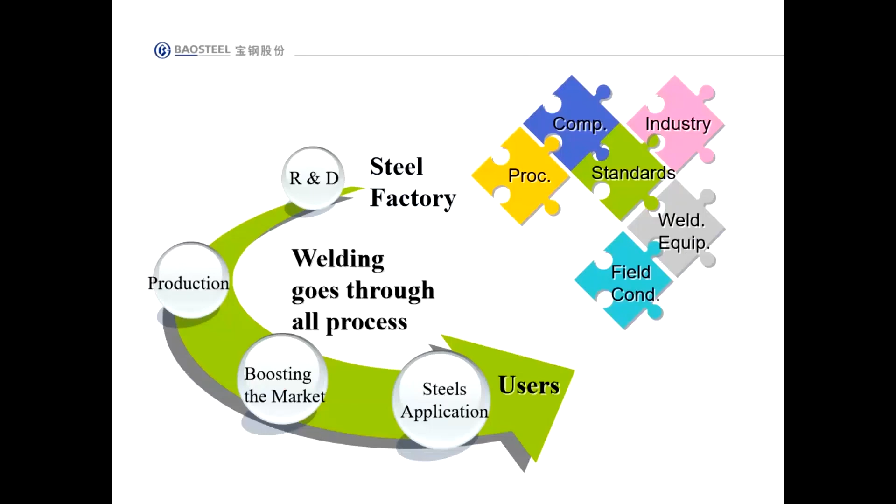There will be 4 parts total in these slides. Part A is a brief introduction of steels and welding consumables. Part B is an introduction of weldability. Part C is the discussion of Gleeble welding research. Part D is the relationship between physical simulation and numerical simulation.

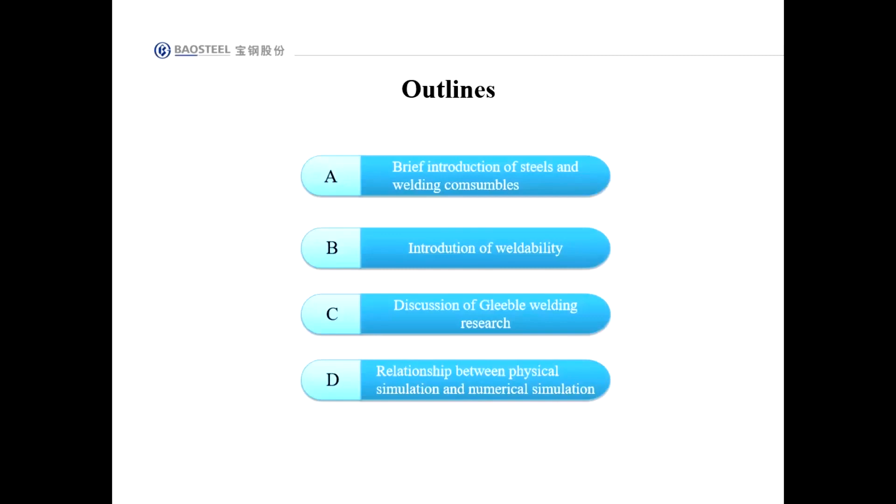Let's get started. Part A is a brief introduction of steels and welding consumables. This is the production process flow chart of hot rolled sheet, beginning from iron ore and coal and ending in our commercial steel products.

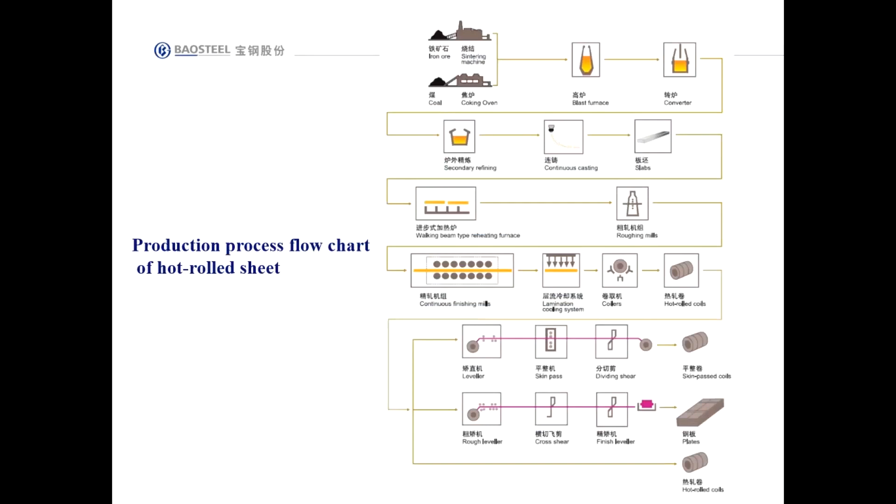Next is our welding consumables. This is the electrode of SMAW. The electrode length is about 250 to 400 millimeters, which are steel rods covered by flux.

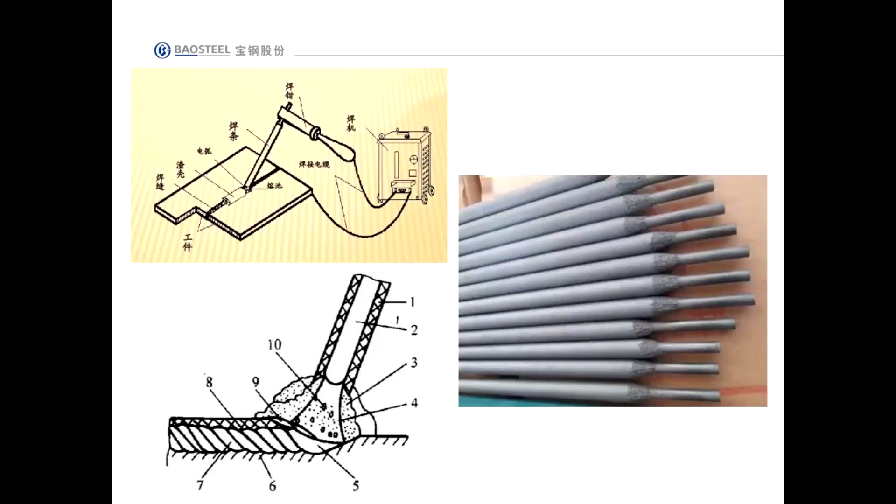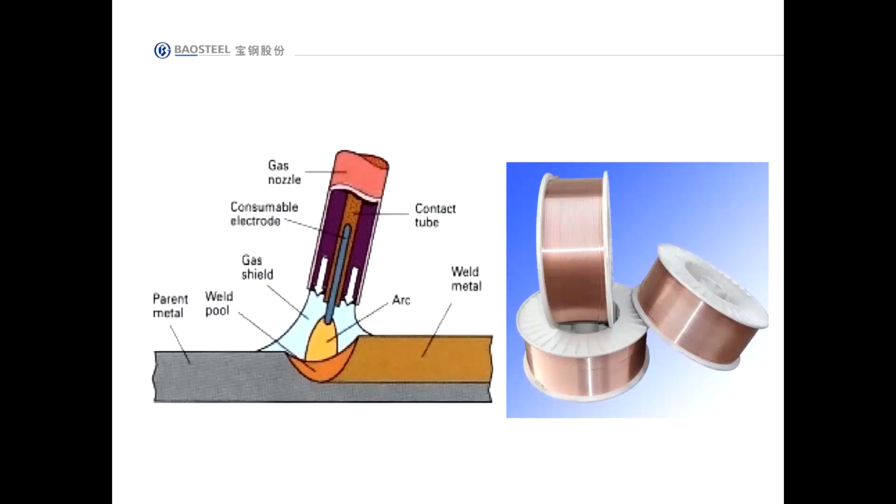For submerged arc welding, the welding consumables are made of welding wires and matched flux. There are several kinds of flux, and a lot of kinds of welding wire. The biggest difference from MAG wire is their diameter is much larger, usually 4.0 or 5.0 millimeters.

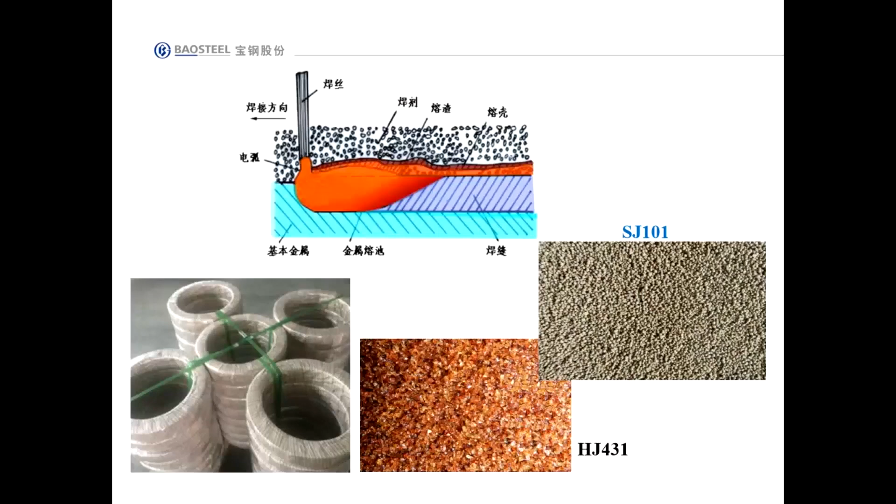For TIG and PAW welding, the welding wire is used as a filler metal, not as an electrode. Usually it is about 1 meter in length, and the diameter is usually 2.4 millimeters.

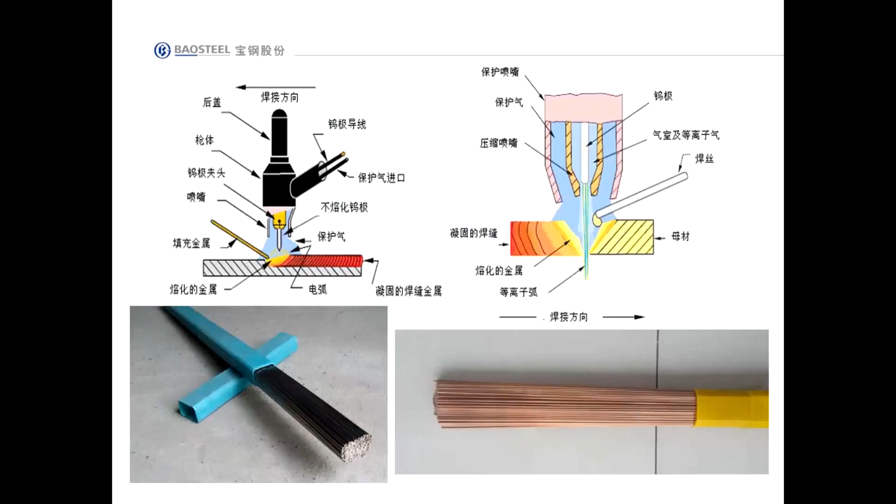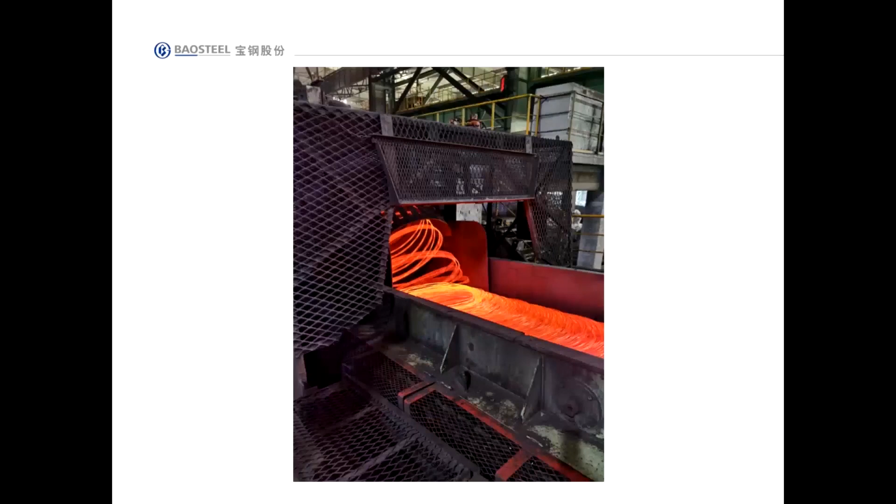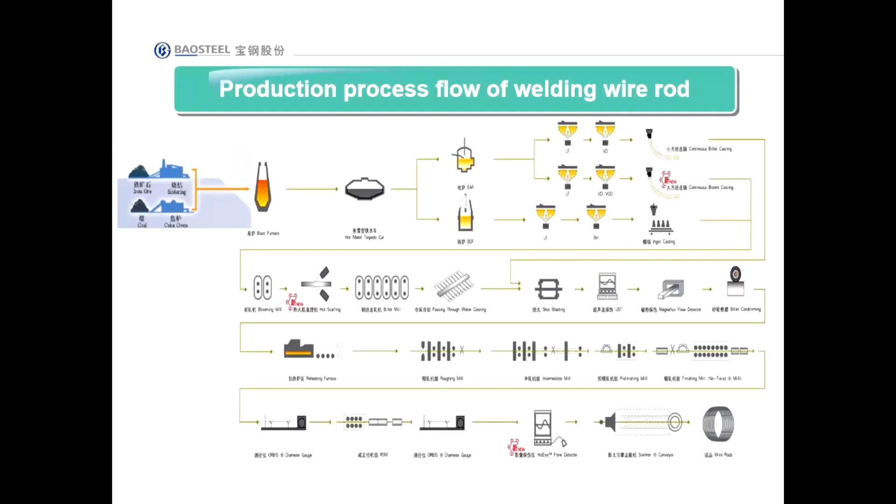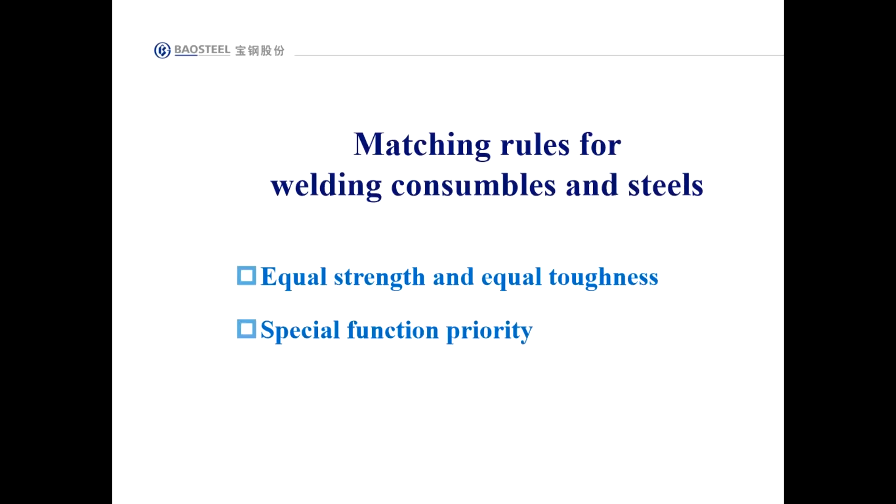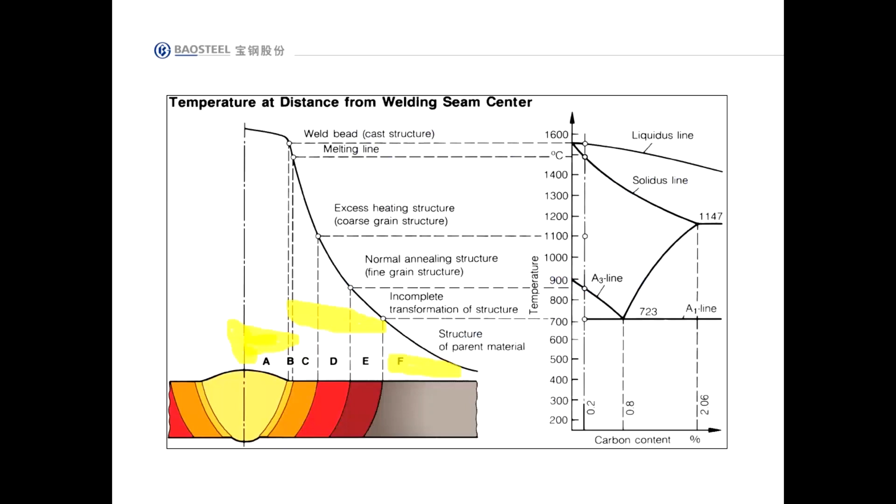This is part A. Next, let's begin part B, an introduction of weldability.

That is to say, we hope it is large enough, because in that way, welding operators of all levels can do a good job, and our steels can be used in much wider application fields. So the welded joint will have good quality, whatever who makes it, whatever situation it is.

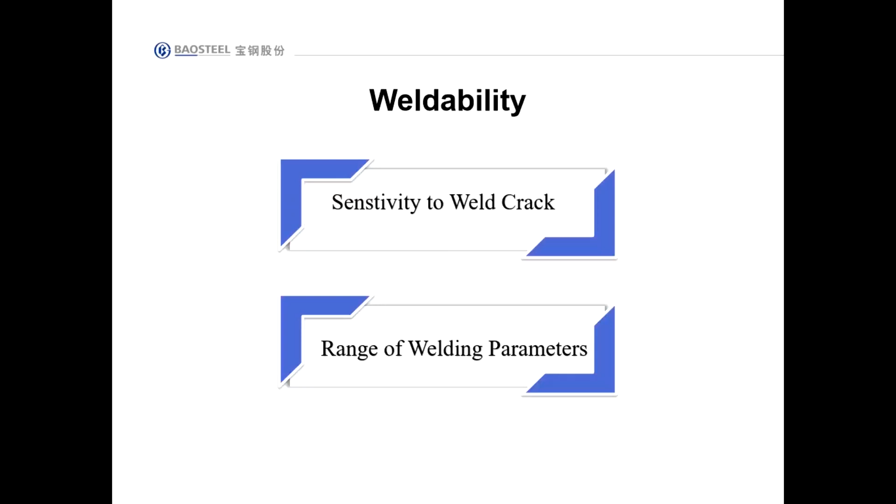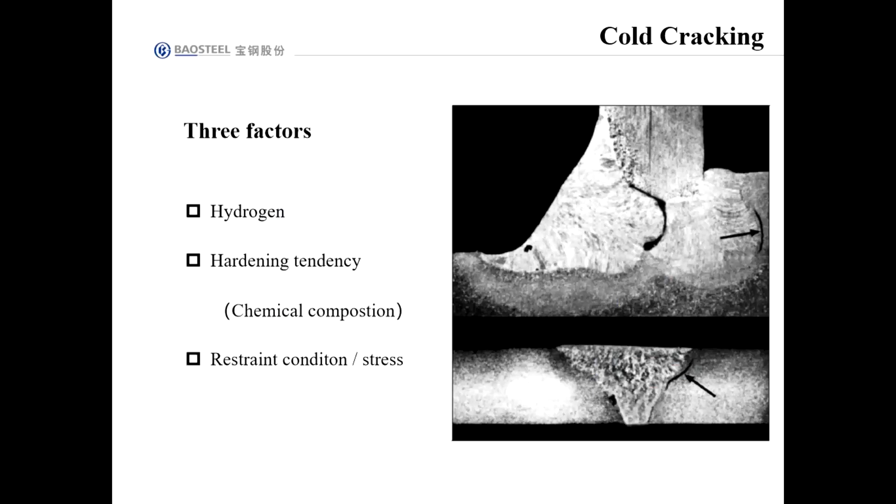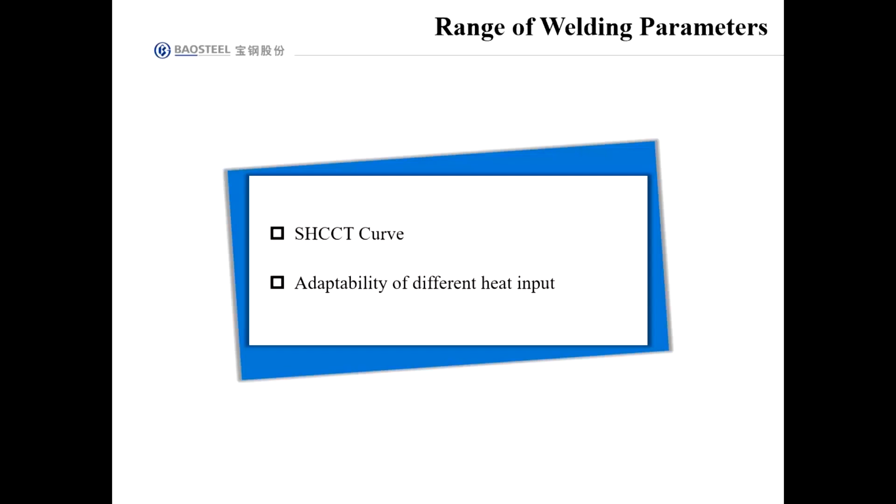Part C is the discussion of Gleeble welding research. This is also the main body of today's topic.

Weldability research can be used to direct the composition design of steels and welding consumables. For example, the hot crack tendency can be evaluated by the value of nil-ductility temperature and brittle temperature range, which is obtained from the high temperature tensile testing.

The cold crack tendency can be obtained from the test of simulated HAZ hardness. SHCCT curve is the base of making a welding process specification, which we also call a WPS. It's very important for our customer to use our products.

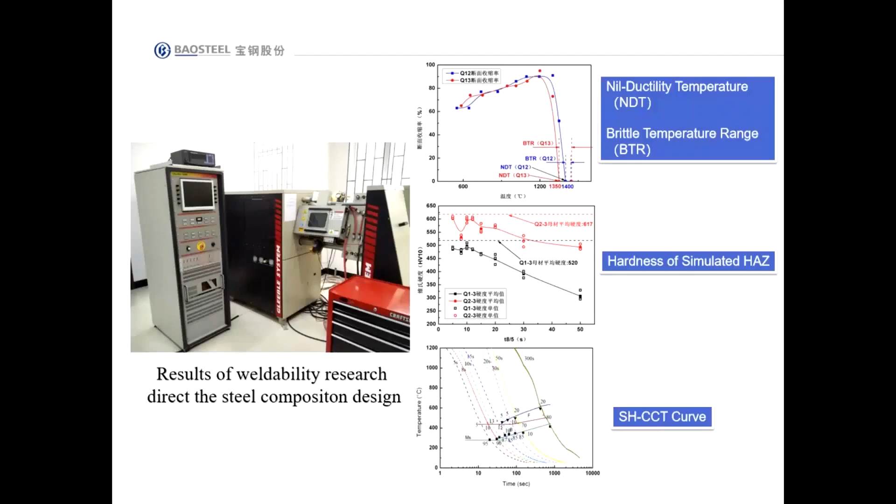Next is a list of some specific Gleeble application scenarios. The first is the microstructure of the simulated HAZ. We can simulate the microstructure at our interested location in the heat affected zone. The simulation temperature program takes different welding thermocycles with different peak temperature and different cooling rate.

We also characterize with T8/5. In this tester, the samples are usually round. These are the simulated microstructure of

coarse-grained HAZ. From this picture, you can know the peak temperature is 1,350 centigrade, and the cooling rate we describe by the T8/5. It is the time from 800 to cool to 500 centigrade.

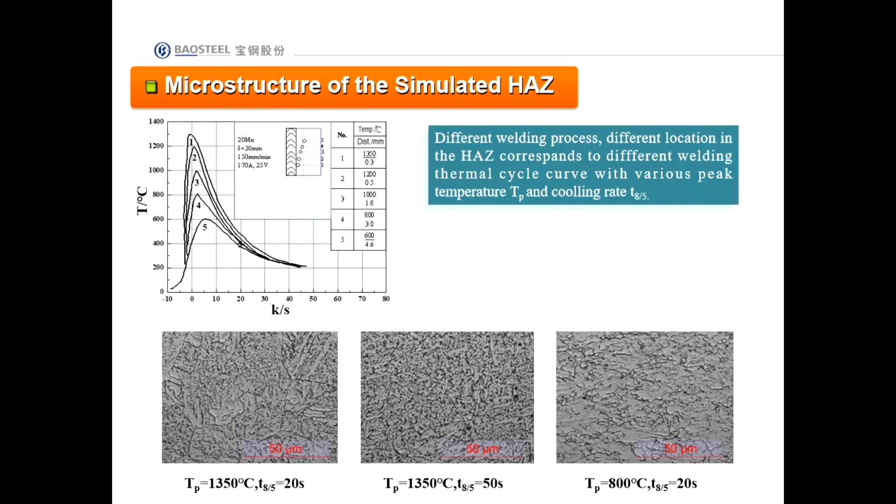The simulated microstructure are in good agreement with actual joints in terms of both the type of microstructures and the grain size. This picture shows the comparison between the simulated and the actual weld joints. This shows that the Gleeble system is very reliable in physical simulation.

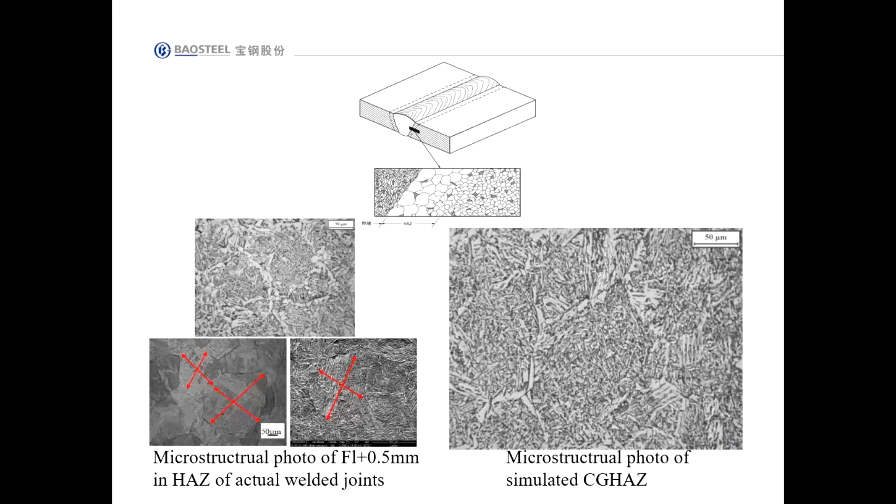Second, the impact toughness of simulated HAZ at the interested position can be obtained. In this test, the square sample is required. This is an example we do, and the test uses different peak temperature and different cooling rate.

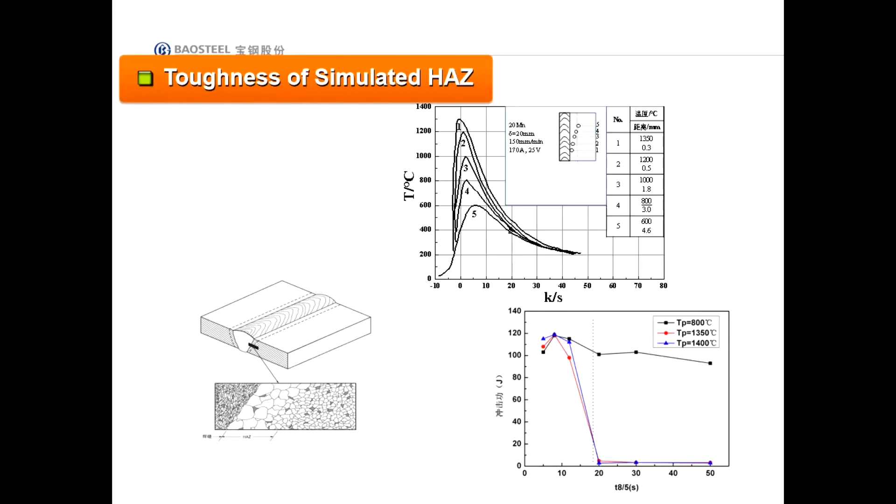Thirdly, SHCCT curves can be investigated and joined. The round bar samples are heated rapidly to 1350 centigrade and then cooled at different rates according to designed temperature progress. During the process, the thermal expansion in real time can be recorded so that the transformation points at different T8/5 can be obtained by determining the temperature of the inflection point in a thermal expansion curve.

Meanwhile, the microstructures and hardness at different cooling rates are observed and measured. Finally, putting the three things together, the SHCCT curve of the material can be drawn like this.

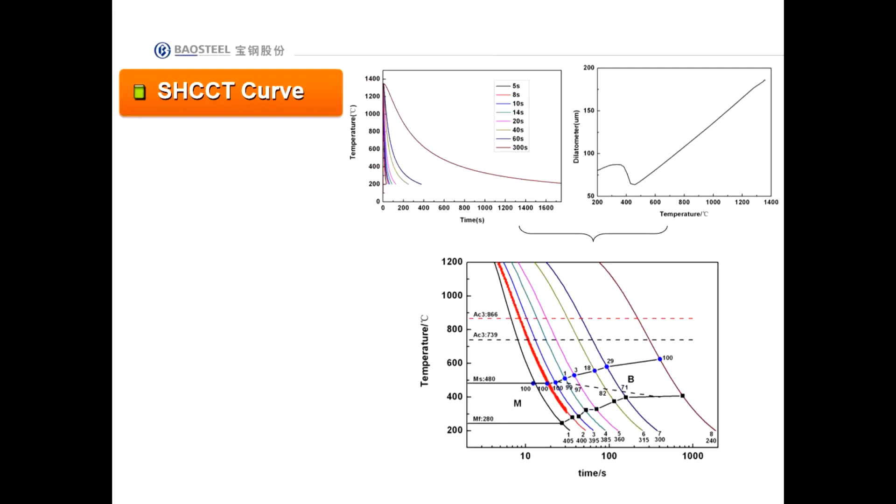This is a SHCCT curve of an ultra high strength steel produced by BaoSteel. This is just an example.

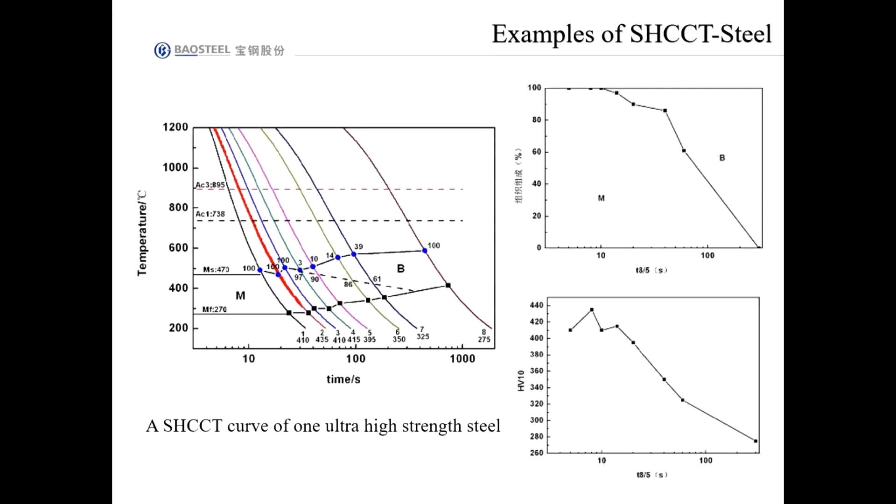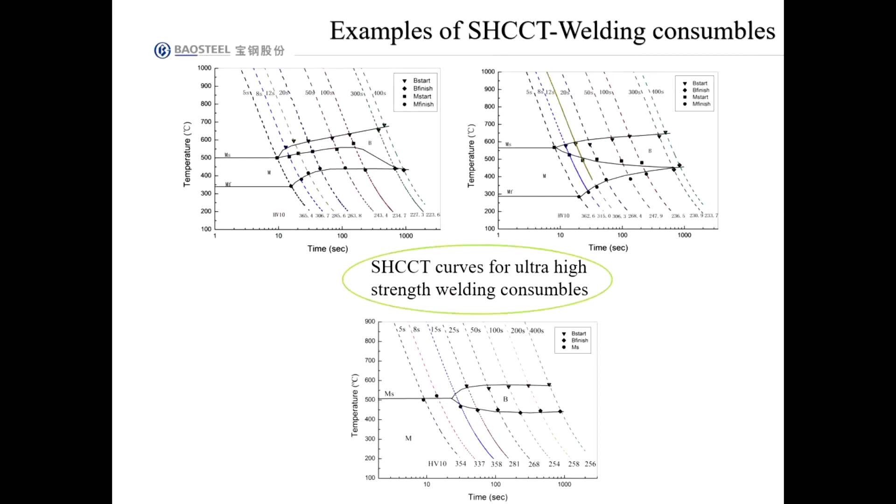This is the SHCCT curves of a series of ultra high strength welding consumables. Actually, it's a series of MAG welding wire with different mechanical properties.

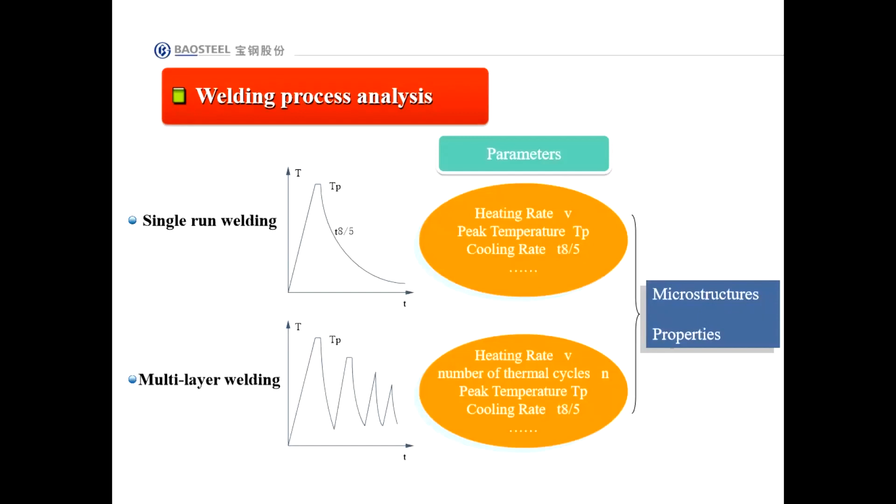Fourthly, a welding process can be analyzed using the Gleeble system. The welding thermal cycles of single run welding and multi-layer welding can be simulated by designing a series of parameters like the heating rate, the peak temperature, the cooling rate, then the microstructures and hardness can be obtained. We can compare and analyze and then decide which welding process is good.

This slide shows an example of a single run welding, which means that only one welding thermal cycle is applied to samples. We can see the tendency of hardening, softening, and embrittlement of steel's heat-affected zone.

Hardening and softening tendency are mainly reflected by hardness tests, while embrittlement property is mainly reflected by the impact toughness test.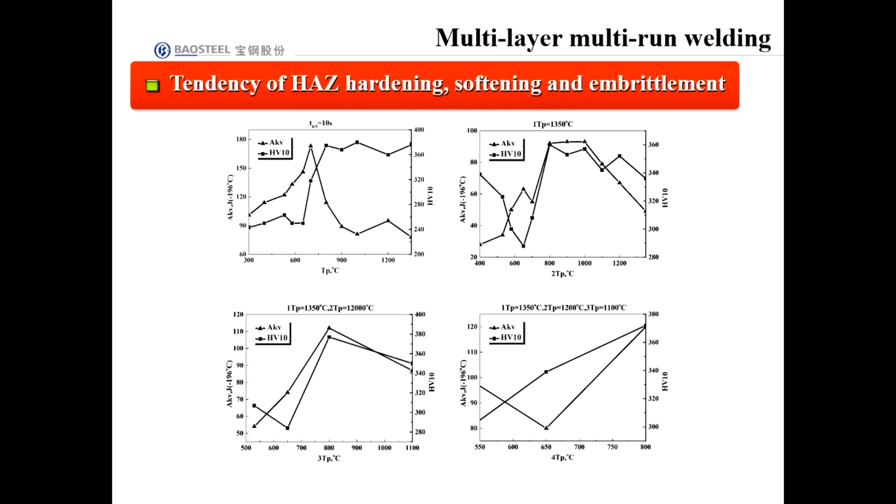Fifthly, a post-weld heat treatment process can be optimized. Which process is better can be found according to properties and microstructures by simulating different post-weld heat treatment processes using the Gleeble system. For example, we can design different simulation parameters, such as the heating rate, holding temperature, the holding time, and cooling rate, just like that.

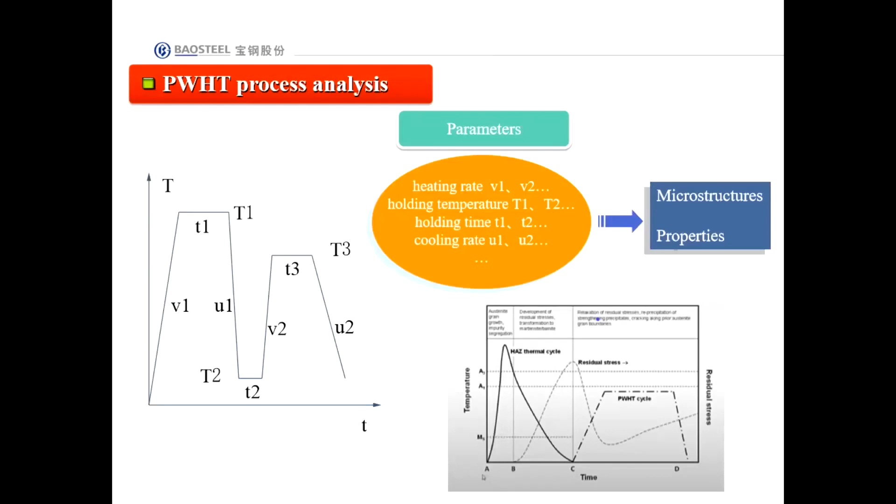For more accuracy, welding residual stresses can also be superimposed.

Next, we'll introduce the sixth application scenario. It can be used to measure the material's high temperature performance data. Some materials' high temperature data, such as the yield strength, tensile strength, and the reduction of area at elevated temperature, can be obtained directly through the test.

The experiment process is like that: the sample is heated to a certain temperature, holding for some time, and then the samples are pulled to break, so we can get some direct results.

We can also get some indirect results, like the nil strength temperature, the nil ductility temperature, the ductility recovery temperature, the brittle temperature range, and the nil ductility range.

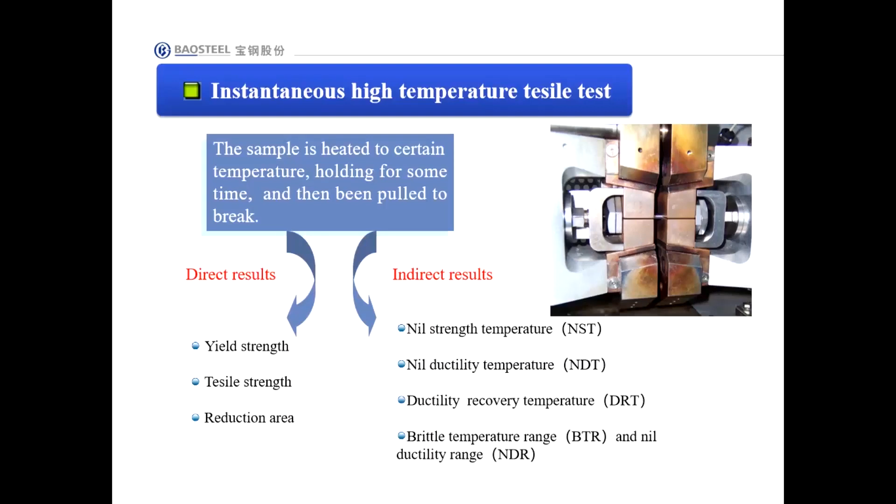The NST can be used as a criterion for weld solidification cracking. What is the NST? It means the strength will be zero when the temperature is over the NST, meaning any small load applied will lead to a crack.

The hot crack is a crack formed at temperatures near completion of solidification, including weld solidification cracking, HAZ liquation cracking, and weld metal liquation cracking.

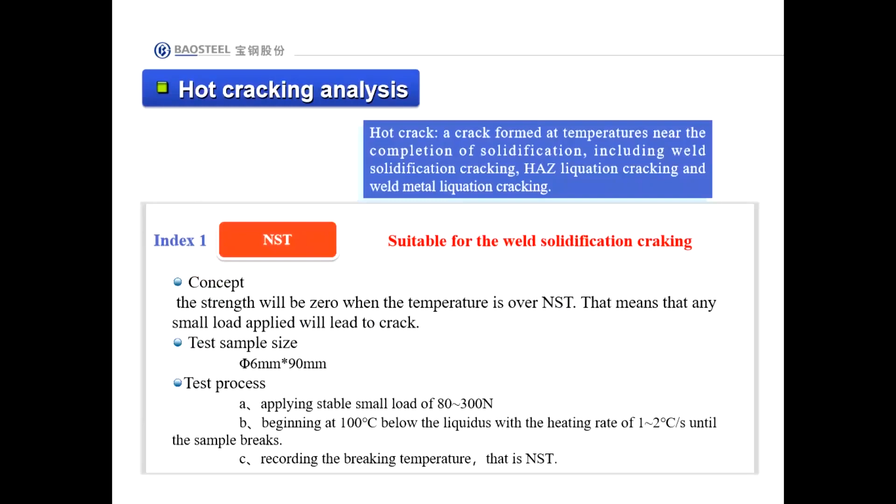The NDT is also a good index for HAZ liquation cracking. When the temperature is over NDT, samples will go brittle, completely losing their ductility.

In this, I don't introduce the experiment process.

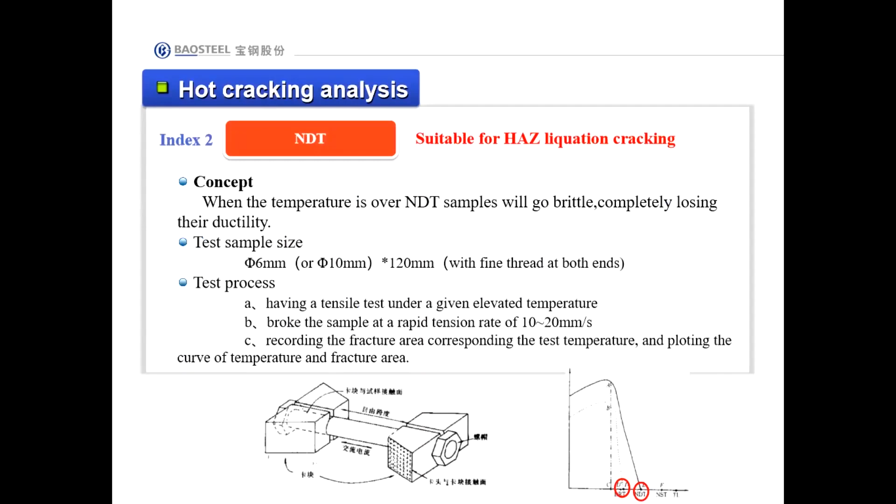The values of BTR and NDR can be further used as criteria for both forms of hot cracking: solidification cracking and liquation cracking. The BTR is the temperature range near the solid phase line when the solid and liquid coexist. NDR is the temperature range near the weld in HAZ when the ductility is close to zero.

So this data we often use in our company, in our research.

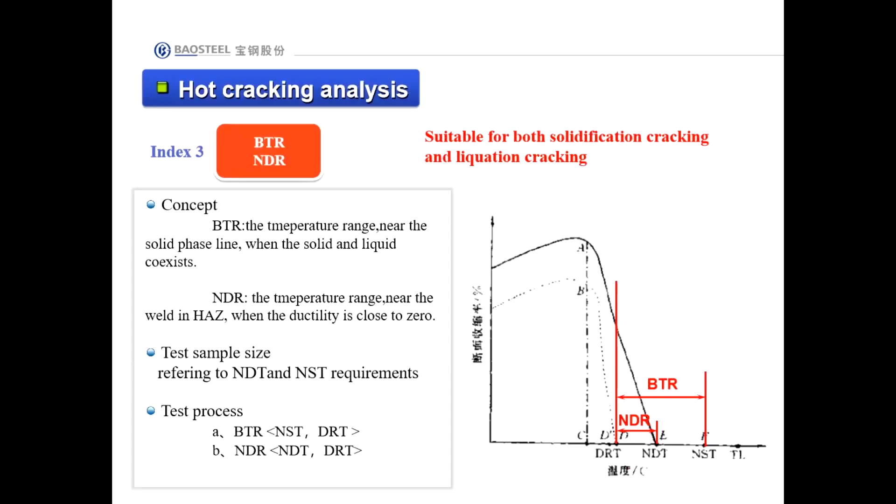Seventhly, it can be used to analyze the tendency of reheat cracking. For example, reheat cracking occurs when HAZ is reheated during post-weld heat treatment or in a high service temperature.

We apply a welding thermocycle to samples first, then do tensile tests at different high temperatures after holding for some time, recording the area reduction and yield strength corresponding to various high temperatures, and calculate the reheat cracking sensitive temperature range. We judge the reheat cracking tendency based on this temperature range.

Through this, we can analyze the steel's reheat cracking tendency.

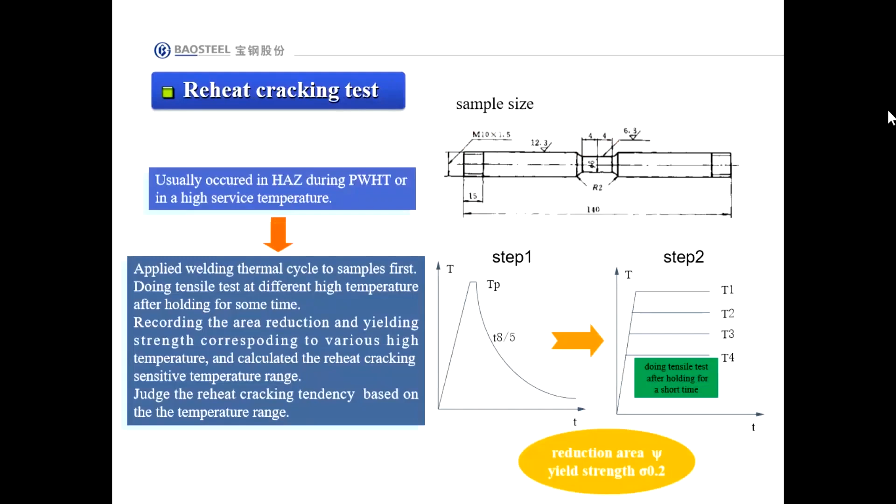Last but not least is to analyze the cold cracking tendency. Applying three factors together to the samples—namely hardening microstructures, a certain amount of hydrogen, and welding stresses—we can get data about cold cracking sensitivity for various steels.

Because cold cracking is very important for us, there are a lot of experiments we can use to evaluate it. So the physical simulation is just one of them.

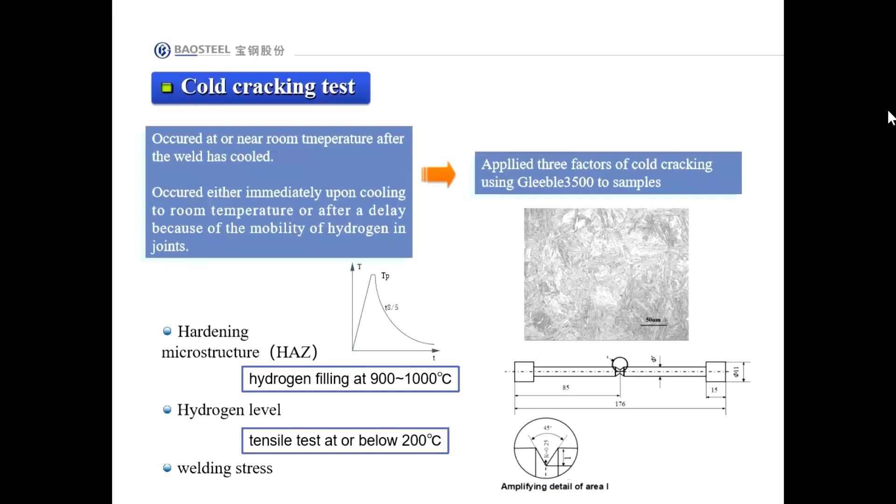Next, let's look at some specific application cases of Gleeble welding research at BaoSteel. Case 1 is the weldability research of an ultra-high strength steel produced by BaoSteel.

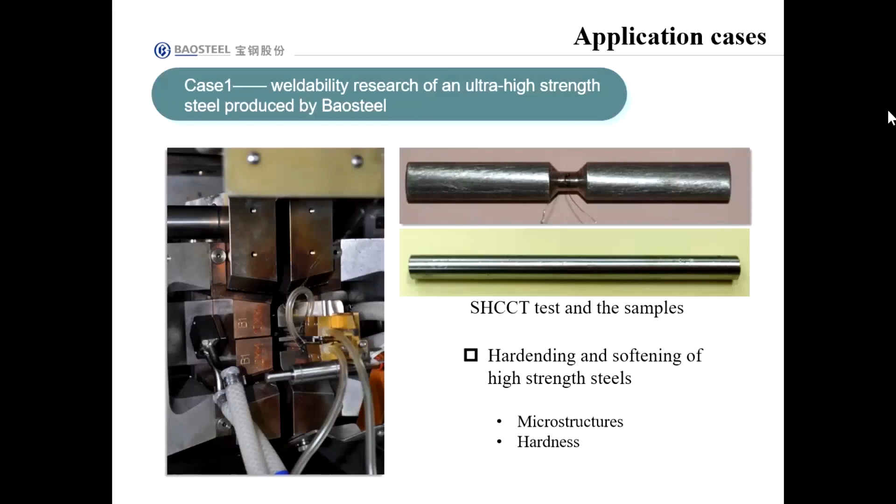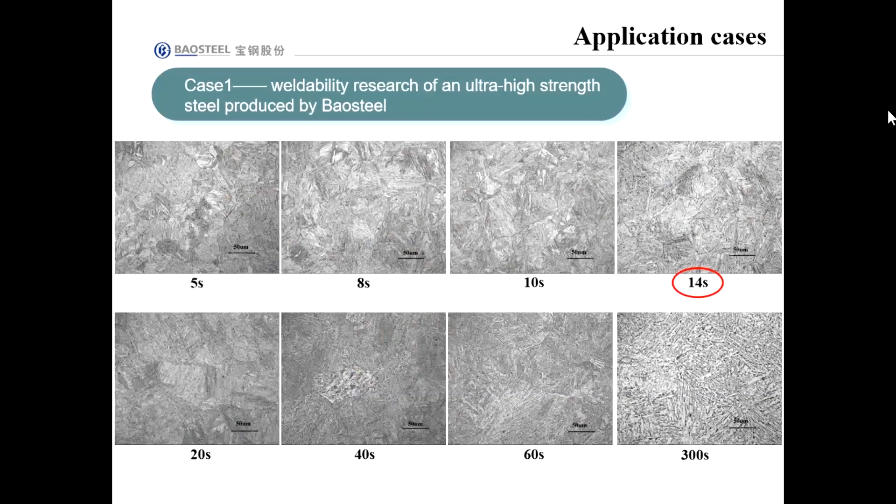Microstructures of the simulated coarse-grained HAZ are shown in this slide. The thermal cycles have a peak temperature of 1350 centigrade, and the cooling time T8/5 is different, ranging from 5 seconds to 300 seconds. So the microstructure is different, and we can see how it evolves with different cooling times.

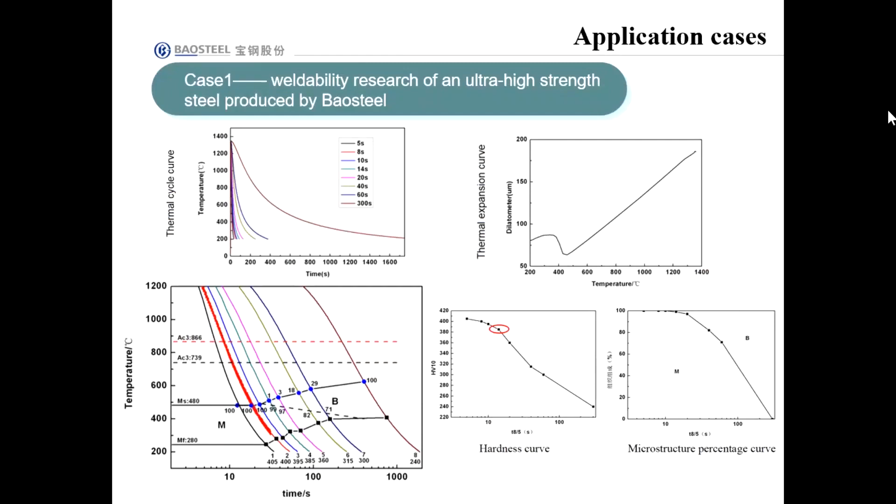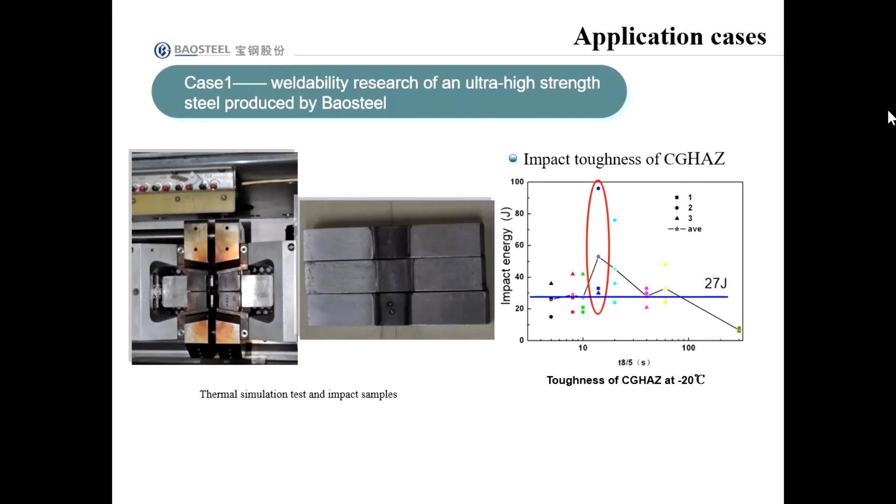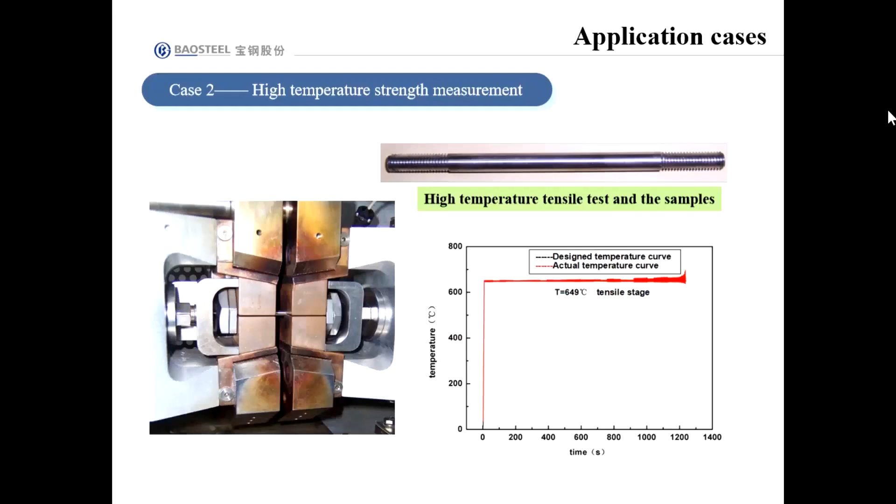The sample for high temperature tensile is shown in this picture. The stress-strain curves can be recorded when the specimens are pulled at a certain temperature, so we can get the yield strength of steel with different chemical composition designs.

By analyzing and comparing the results, the steel with chemical composition that meets the requirements of high temperature strength can then be selected. So it is very useful for us to select the steel's chemical composition.

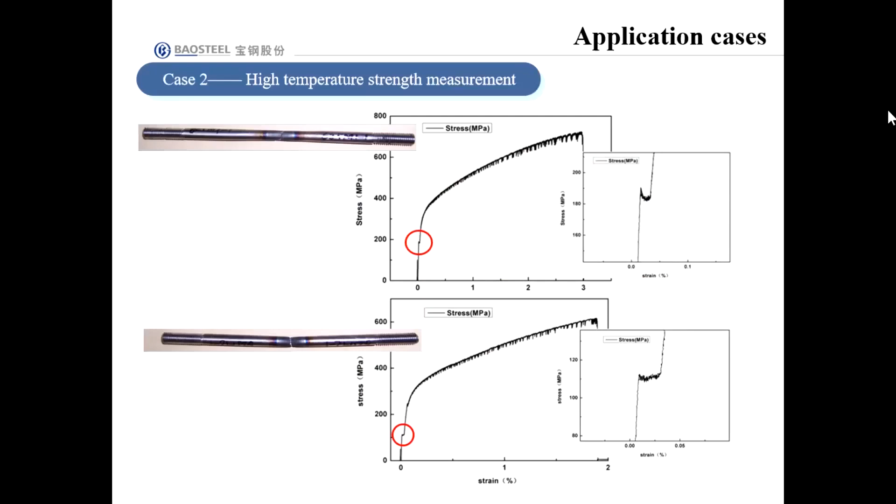Case 3 is about reheat cracking research. Reheat cracking occurs when the welded joints are reheated within a certain temperature range, such as the post-weld heat treatment. The stress-relieved heat treatment is a common PWHT heat treatment. It's common for pressure vessel steels and heavy plates.

Usually, a reheat crack starts in the coarse-grained heat-affected zone and ends in the fine-grained HAZ.

The test process is as follows. The first step is to form a weld metal and its HAZ by carrying out TIG spot welding in the center of the sample. The second step is to apply a certain strain at a specific high temperature. The last step is to check cracks by metallographic inspection.

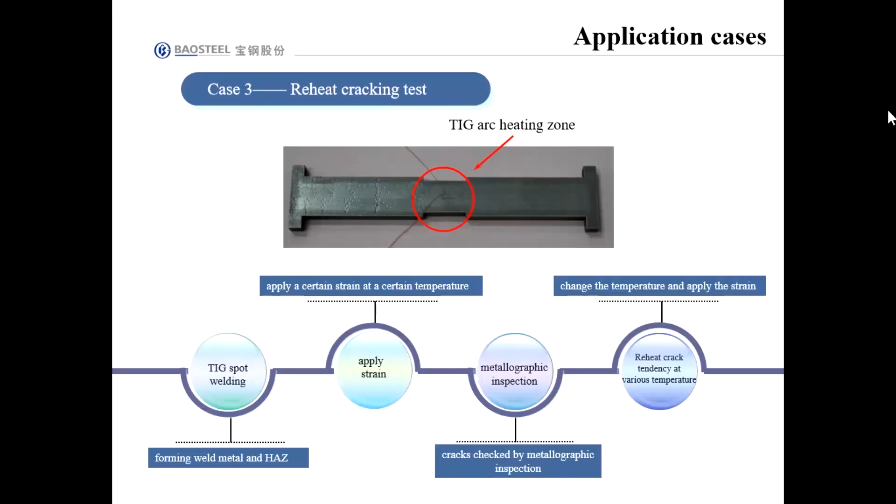This is the metallographic observation of the welding zone at the temperature of 780 centigrade with different strain. It's from 6%, 12%, and 20% strain respectively.

In the end, the excessive strain, for example the strain of 20%, causes the sample to break. So this is all about part C.

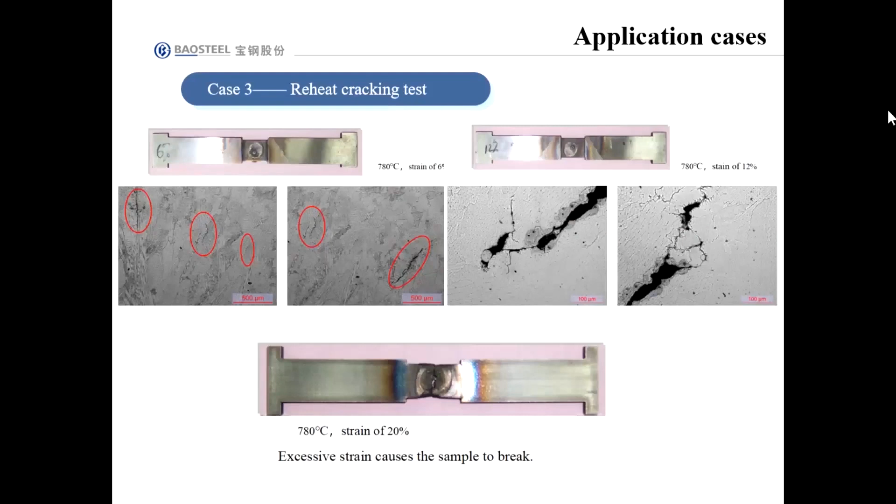Next, let's introduce part D. Part D is about the relationship between physical simulation and numerical simulation.

Generally speaking, nowadays numerical simulation is becoming more and more in fashion. Today I want to emphasize that physical simulation is the base of numerical simulation. And if the numerical simulation is based on physical simulation, then it will be more accurate and have better application.

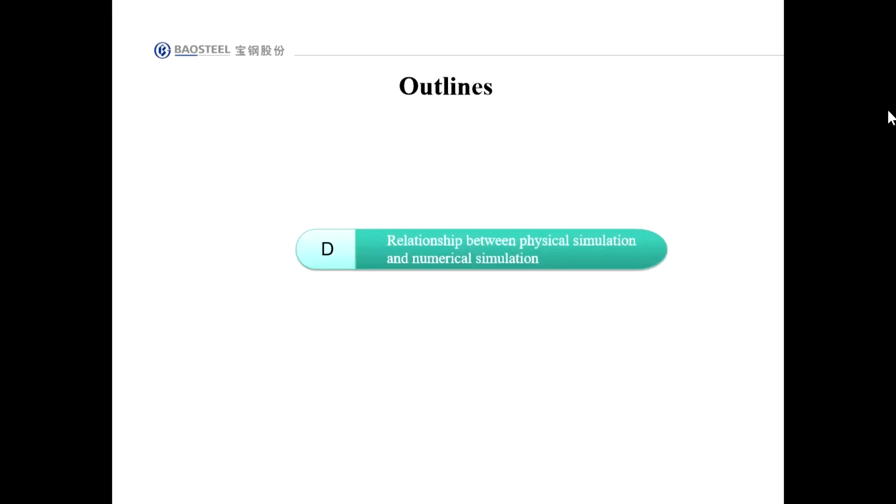So let's look at an example in our company. Numerical simulation is very useful, and this is an H-beam made of hot-rolled high-strength steel. The H-beam is the main load-bearing member, so there are stricter requirements for its size and deformation. The deformation is mainly caused by welding.

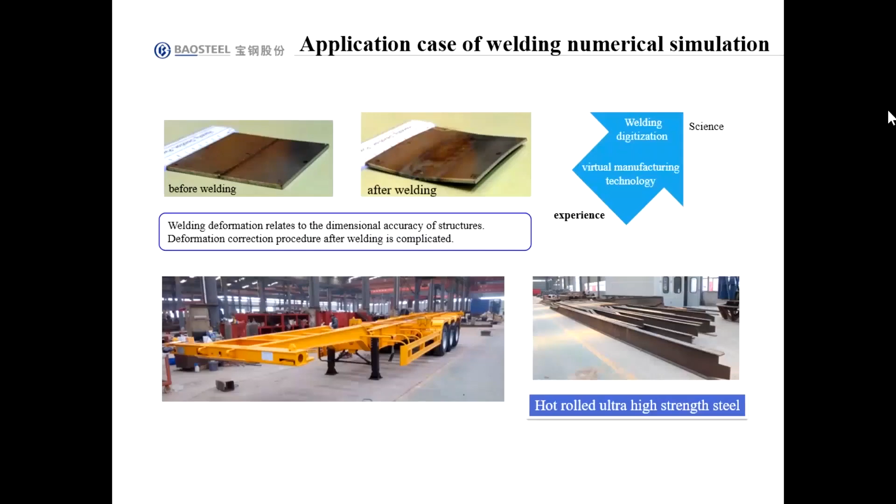The different levels of welding deformation represent the different manufacturing levels of the company. The welding process involves a coupling among temperature, microstructure, structure, and stress.

So the deformation of the weld structure contains three factors: the mechanical, thermal, and metallurgical factors. So the welding deformation of the structure also comes from these three sides.

Just like the equation, the total welding deformation equals the elastic and plastic strain. They belong to the mechanical analysis, so we should consider them.

For the third part is the thermal strain. This is the thermal analysis. The thermal strain is caused by different welding processes.

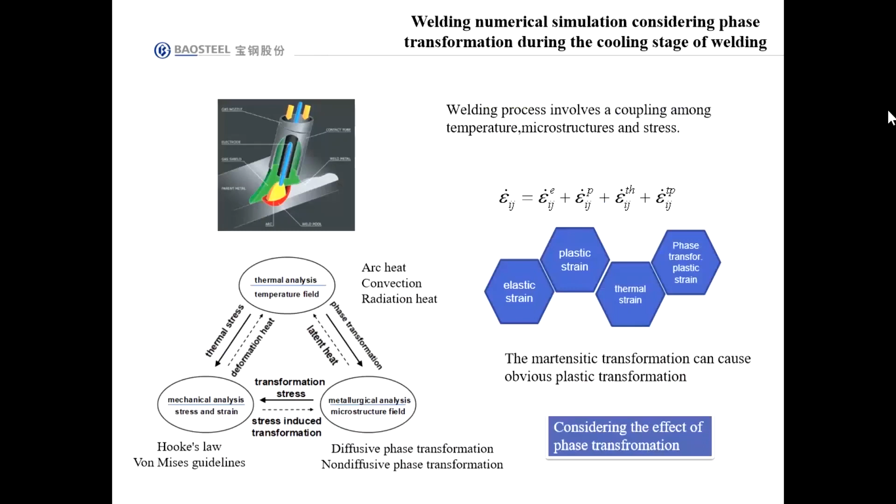So the welded joints include three parts roughly. It is the weld metal, mainly made of the welding consumables. And the base metal, it is ultra-high strength steel. And its HAZ, the heat-affected zone, can also be divided into several parts.

Their mechanical properties are very different. So in the material model of the numerical simulation, the three parts should be considered respectively if you want to have a good effect.

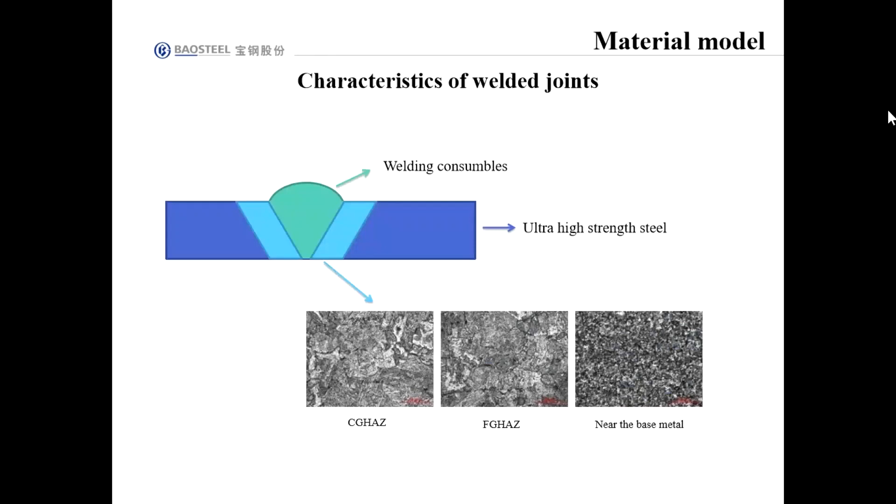In the material model, the physical parameters of the three parts must be considered, such as specific heat capacity, thermal conductivity coefficient, density, elastic modulus, Poisson's ratio, yield strength, and linear expansion coefficient.

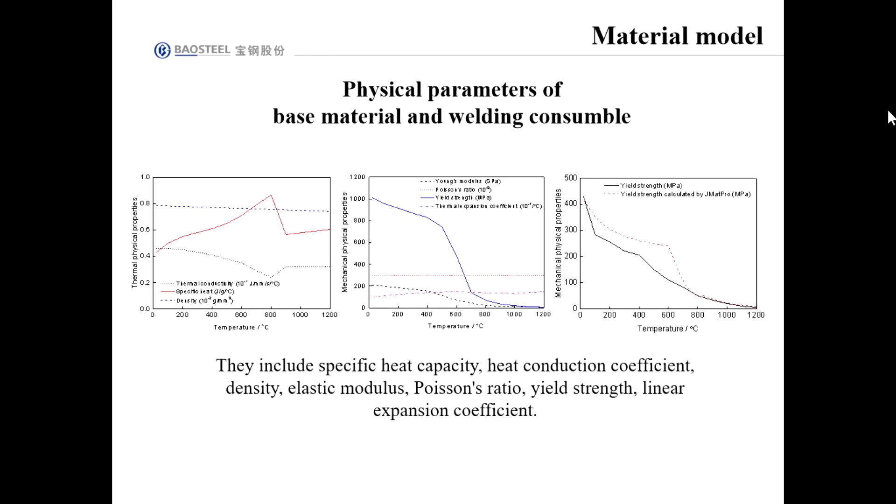Gleeble system can be used to measure the SHCCT curve of the base metal and of the welding consumables. If this data can be input to the material model of the numerical simulation, then the numerical simulation will be accurate.

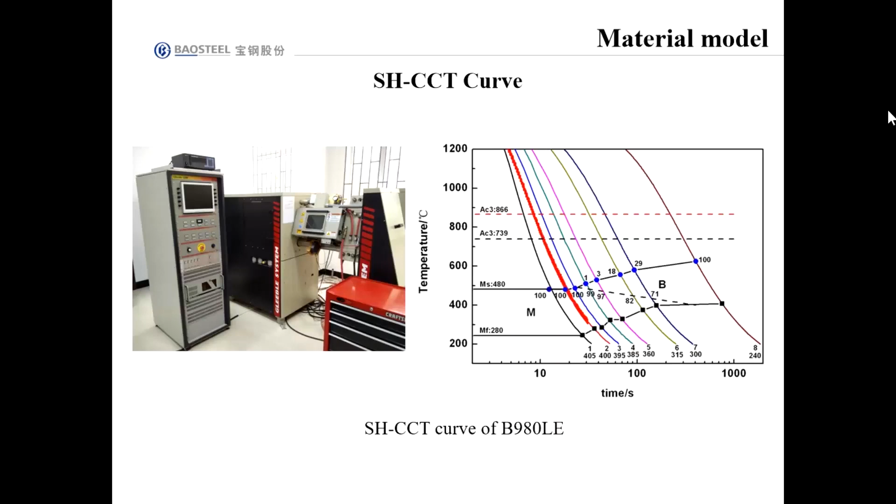We also can get the yield strength at a series of high temperatures obtained through Gleeble system testing. Once these data are input to the material model, the result of the numerical model will be perfect. We try to do this.

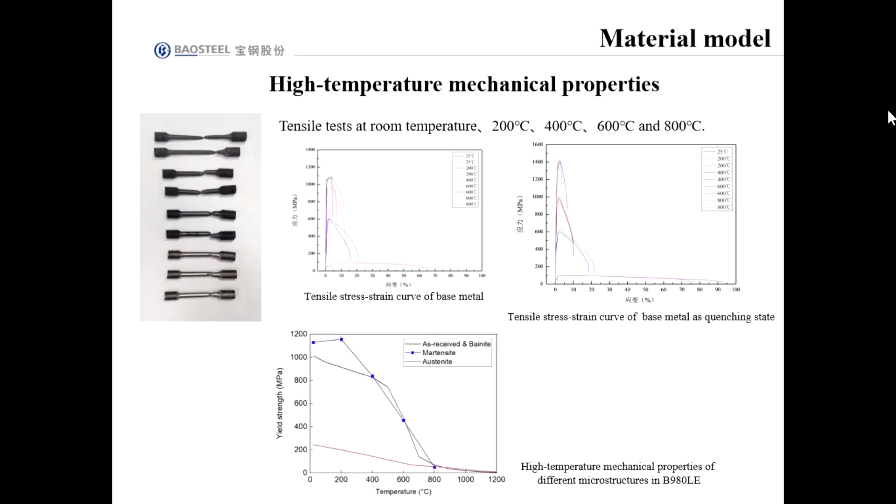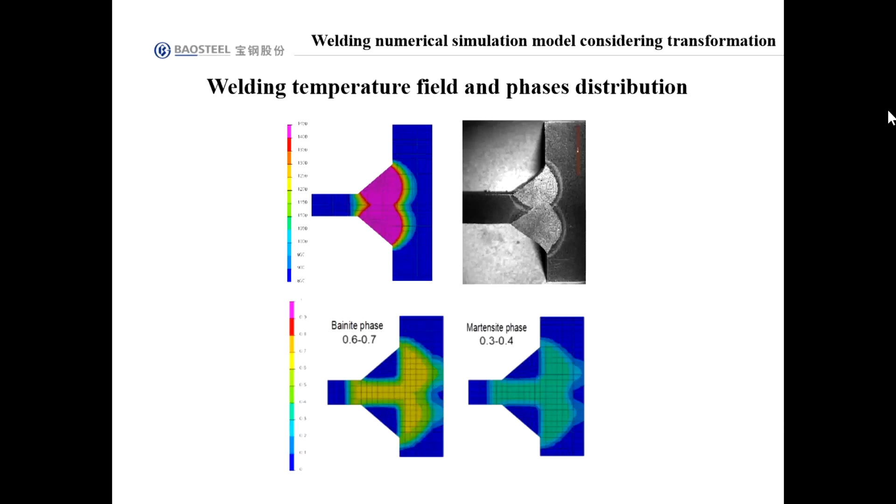Considering phase transformation in the numerical simulation model for the ultra-high strength steel structure, the microstructure and proportional distribution in a welded joint section are shown in this figure. Also, the welding temperature field is shown in this picture.

When transformation is considered, the predicted maximum welding deformation of H-beam with 1 meter long is 3.48 millimeters. When transformation is ignored, the predicted maximum deformation of H-beam with 1 meter long is 5.06 millimeters.

Comparing with the actual H-beam of 1 meter, we found that if you consider the transformation, it's closer to the actual welding deformation of H-beam. That means transformation has some influence on welding deformation. For high strength steel or ultra high strength steel, we must consider the effect of transformation.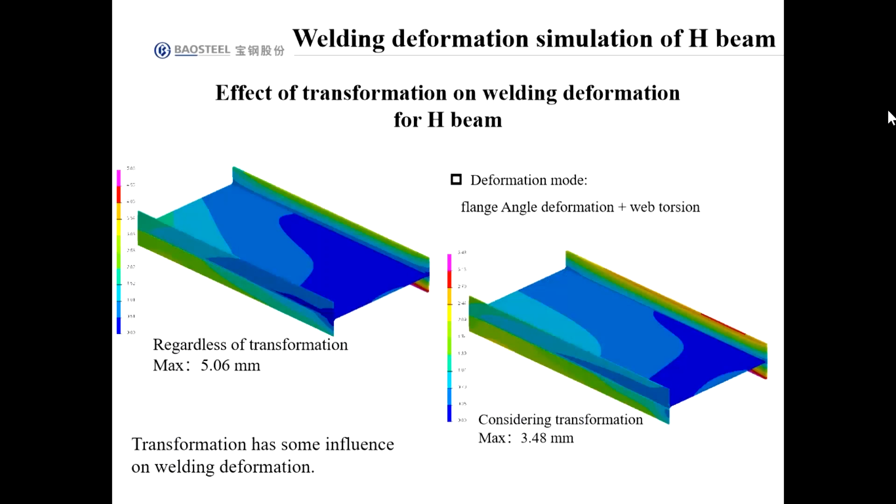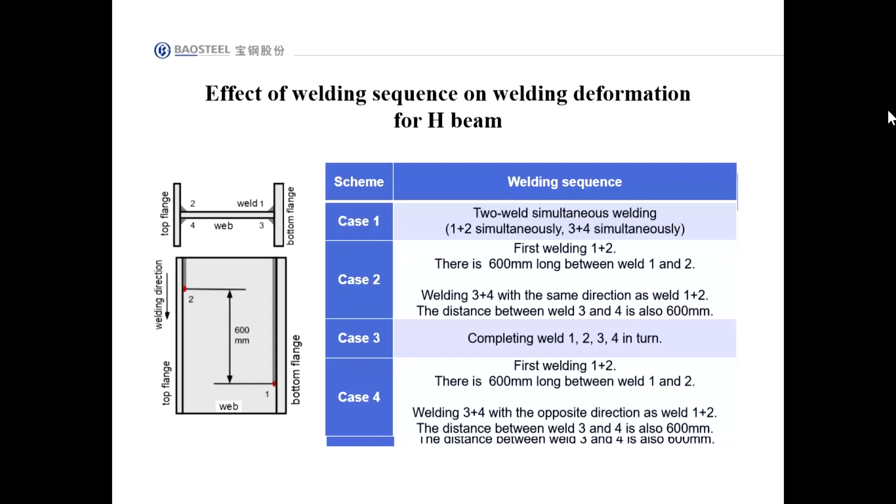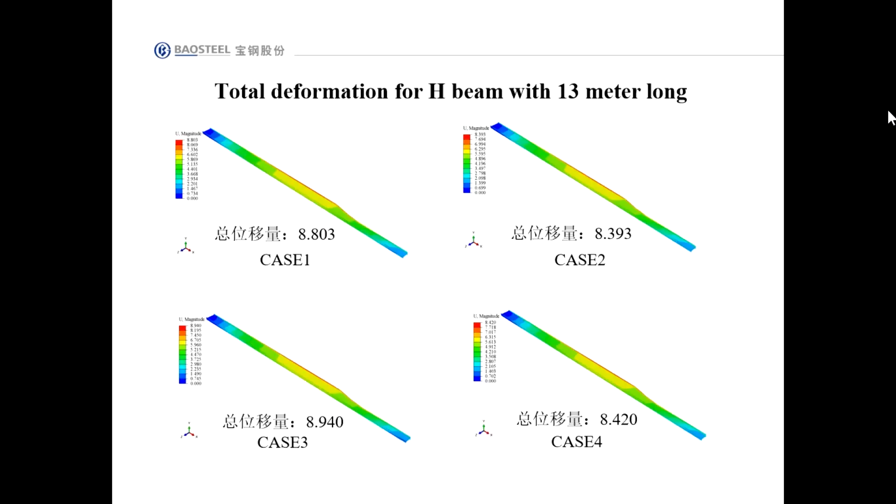The difference between case 2 and case 4 is the welding direction. The welding direction of both sides of H-beam in case 2 is the same way, while in case 4 it is the reverse direction. Since the total deformation of both processes is very small, does that mean both processes work well?

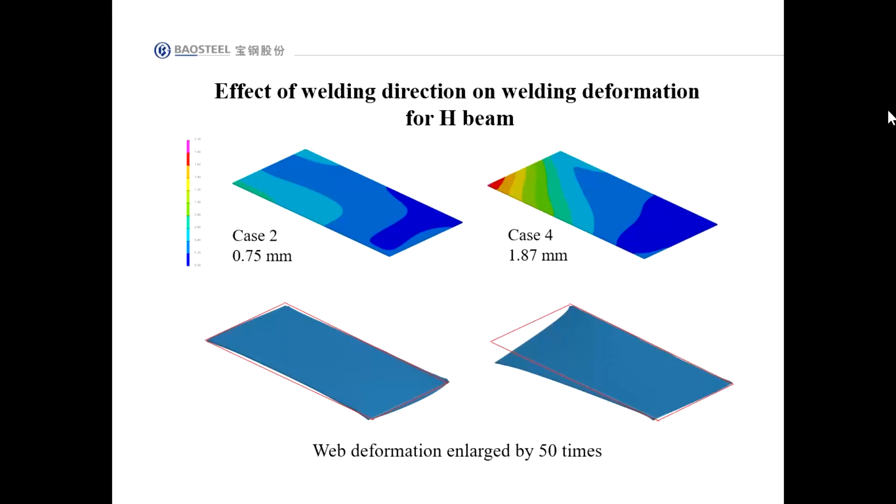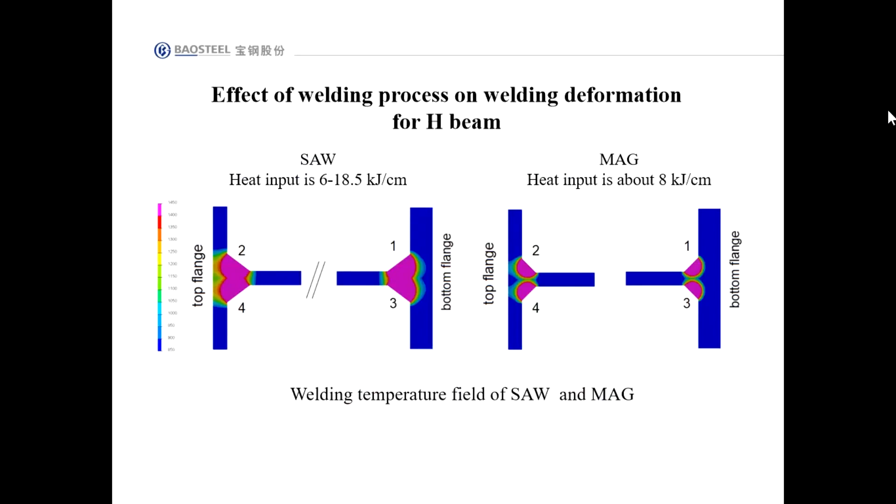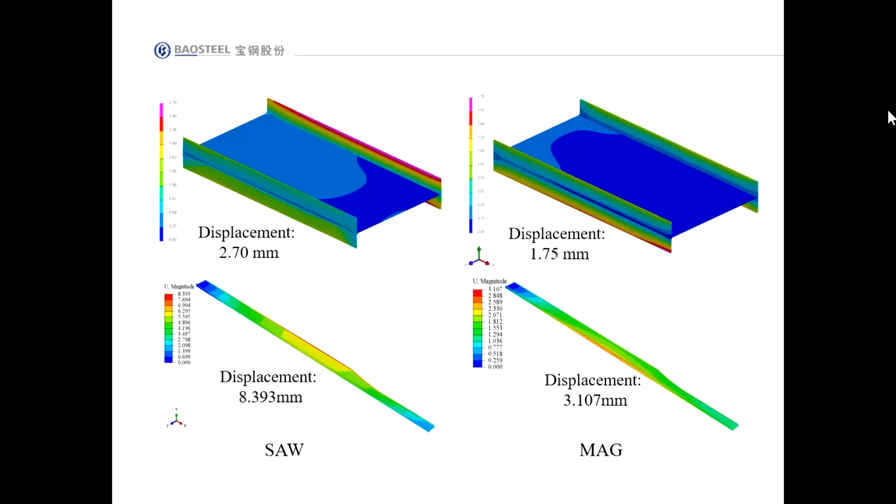This is the result, the predicted welding deformation. We can see that the maximum deformation of H-beam with 13 meters long is 8.393 millimeters for submerged arc welding. And the maximum deformation of H-beam with 13 meters long for MAG welding is 3.107 millimeters. So it's very clear that MAG welding is strongly recommended for our customer.

These are some very useful results for our customers to use when applying our high strength steel or ultra high strength steel. These results of numerical simulation are very useful to help our customers improve their welding quality. However, please remember, physical simulation is the base of numerical simulation - physical simulation is the key to building a better model for numerical simulation.

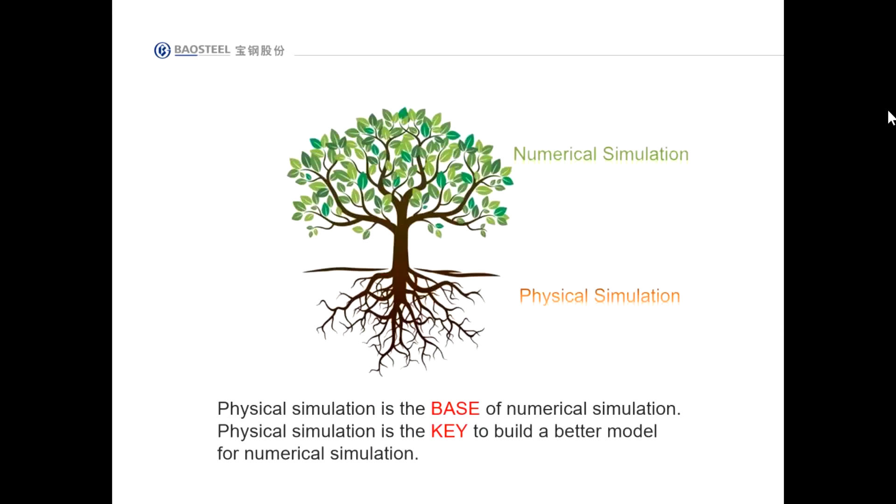Today, that's all we're sharing with you today. Thank you for your attention.